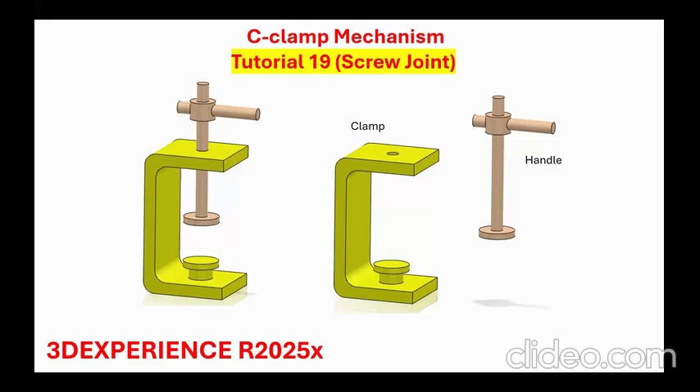Just to put things in perspective, dimensions are not important here, but I'm going to assume that this is 12 centimeters and the initial distance between the clamp and the wall—I'll call this thing handle, and the wall—is 3 centimeters, just to put things in perspective. And I'm going to assume that we have a pitch of 0.5 centimeters. So every turn of the handle will advance this thing or retract it by 0.5 centimeter.

Now, of course, it's possible to do this and show it as a cartoon and it looks nice, but how do we verify there is actually physics there? So what I'm going to assume is that the handle turns at the rate of 2 turns per second. So in 1 second, it goes twice, and that means that this clamp will advance 2 times 0.5, which is 1 centimeter.

But then we're going to do simulation in 4 seconds, so it's going to be 4 times 1 centimeter. In other words, after 4 seconds, when we turn this thing 8 times, 8 times 0.5 is going to give you 4. So the offset, if we retract, is going to be 3 plus 4, which is going to be 7. Or obviously, if you advance this thing, this is going to crash into that—you can't do that. So I'm assuming that we are retracting this.

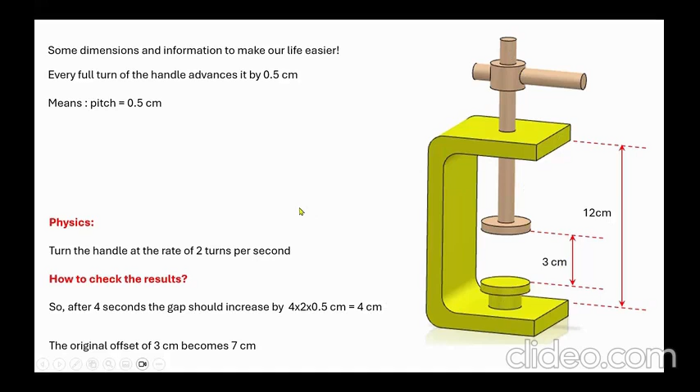Good. Now I will make a simplified version of that handle—basically the same thing, but simplified. Now, when we try to create a screw joint, there are many things that we have to select. These next 4 slides that I'm going to show you don't mean anything until we get there when I do the problem for you, and then I will come back and discuss them.

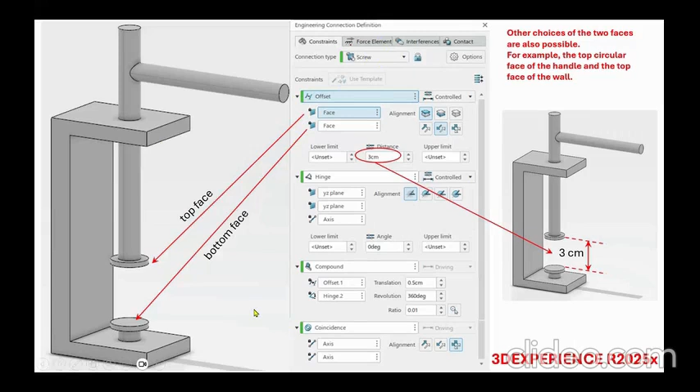So this is the first slide. This is the next slide. You have to select a bunch of other things. And then down here, this is where the pitch is defined. Finally, this one is something that's needed to define the axis of the motion of this C-clamp.

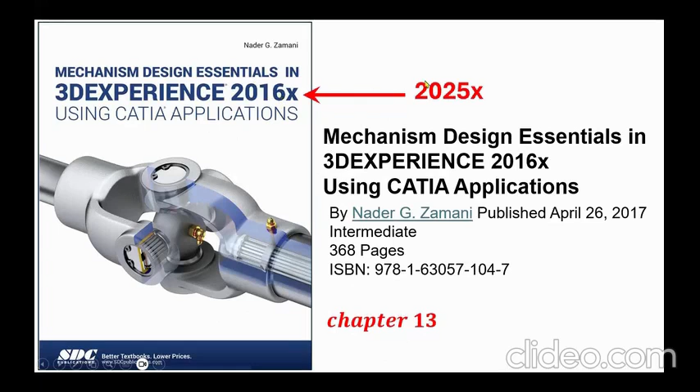This is chapter 13 of the textbook that I did 8 years ago, 9 years ago, and it was not updated, so I decided to do these tutorials instead of going through the book and updating it. Okay, good. So let's go ahead and create the assembly.

All right, let's go make the assembly. So already I'm in the assembly design. So insert the wall first—this is going to be the first part, it's going to be the wall. I'm going to make it.

So on that vertical plane, we'll sketch something that resembles that wall. Let's go with something that looks like an L. It's about 12—this is 12, roughly 12 centimeters. Doesn't have to be exactly that. It's just that I want to have an idea how big these things are, that's all.

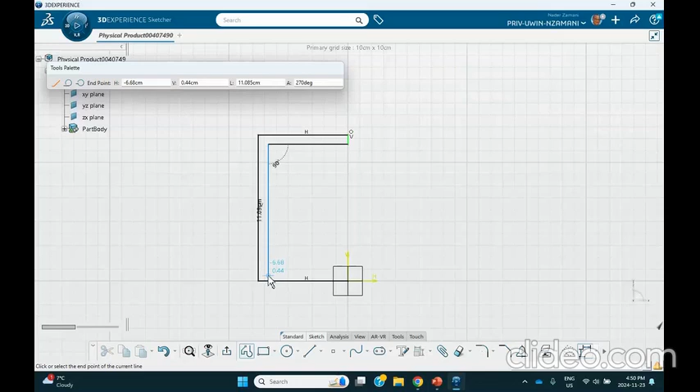Okay, good. Well, actually, let me make this thing 12. Here, dimension from here to here, 12 centimeters. All right, but it's just that this has to be a little bit higher. Let's move on. Exit.

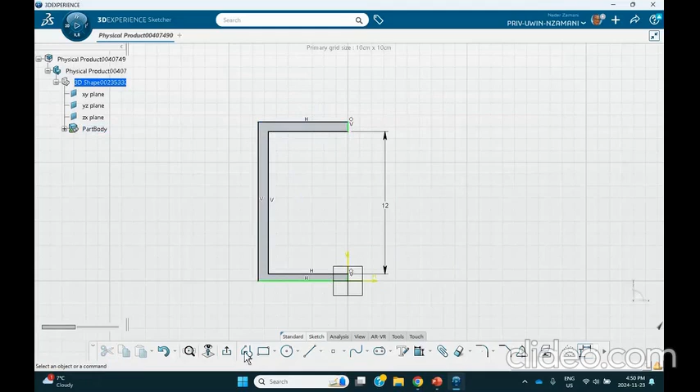And we're going to pad it symmetrically, just so that it's nicer. On that top plane, I will sketch a little circle—this is where the pin is going to go through. Exit. Make a pocket here.

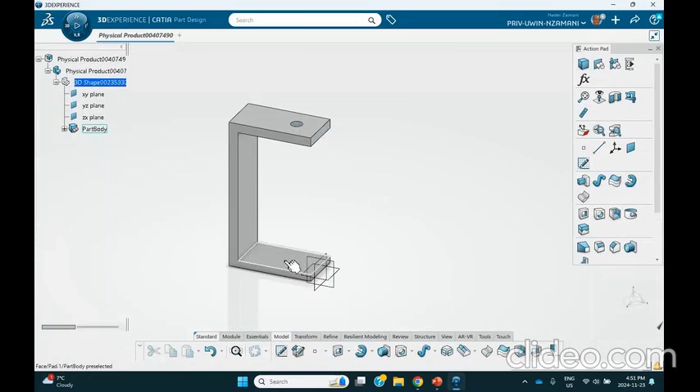Good. And then I make the stand at the bottom. On that plane, I will sketch. Why don't I project that circle? Okay, and exit. We pad it a little bit, maybe by 1 centimeter, and put the stand on top of it.

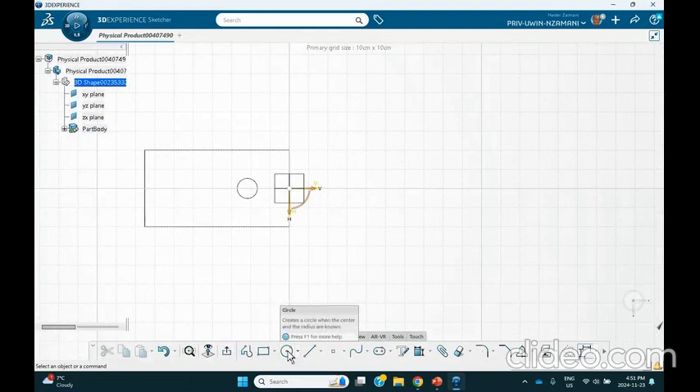So on that top plane, we'll sketch. Let's see now. I want to make something concentric with that. So right now, let me draw something like so, but it's not concentric. I'll control this middle curve, and make it concentric. Concentric. Okay, good. Exit. And now pad it by 0.25.

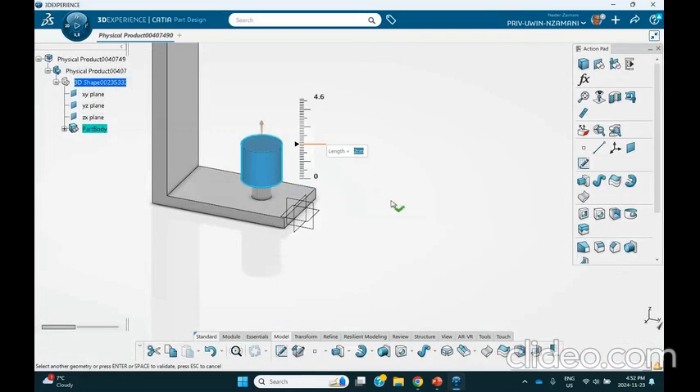All right, now we can go and make the rest of the thing. So all the way to the top, insert a 3D part. This is going to be the handle. Double click on it, and let's make it. So for example, on any convenient plane, for example on that plane, I will sketch a circle that size.

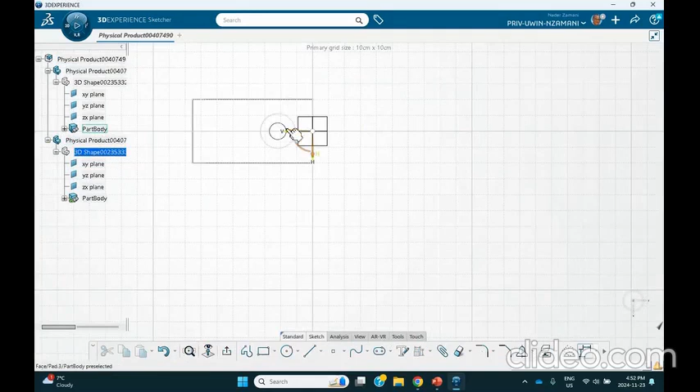So that being the case, I'll project this instead. There we are. Exit. And now I'm going to pad this. We make it in both directions. And yeah, I'll probably be okay. A little bit more, maybe.

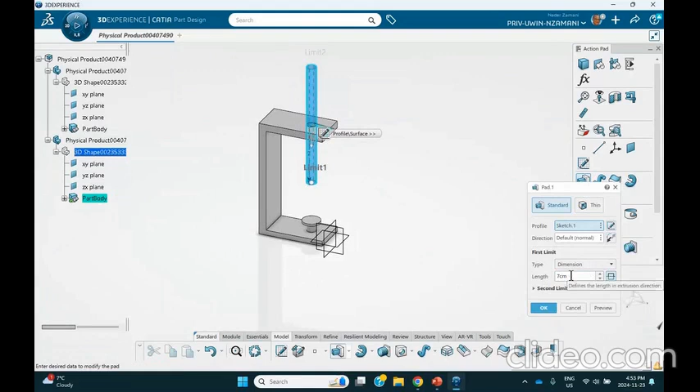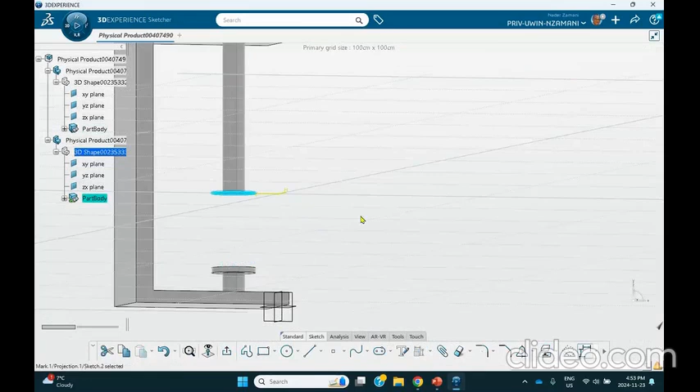Okay, good. So to do the rest of the stand, first of all, on that plane we'll sketch, project that big circle. It's just that I'm too lazy. I don't want to do a lot of circles and stuff like that. Project that. Okay, there we are. Exit, and pad it by 0.25.

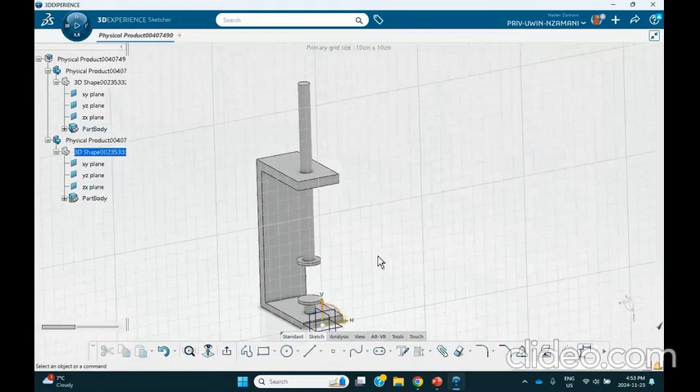Good, and finally the handle. There were different ways of doing it. So what I'm going to do is this: on that vertical plane, where is this? On that vertical plane, I'll sketch a little circle and then pad it. Maybe something like this.

Exit. And then pad it more. Oops, pad it. I find it easier like that. So pad it up to surface, up to this surface. And then maybe a little bit, yeah.

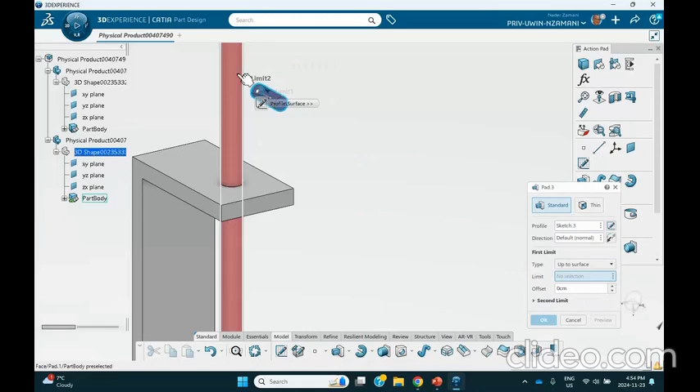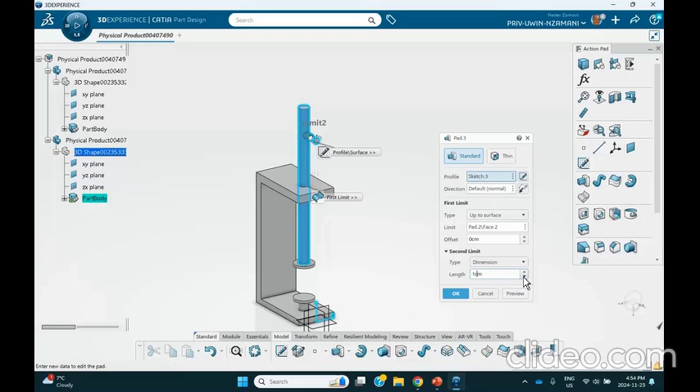That's good. I mean, if you want to make this thing longer on the other side, let me see for a second. Second limit. You want the second limit, go further this way. Okay, and these are basic CAD stuff that you already know.

All right, so that's this. So we have two pieces: we have the wall, basically the first piece, and the handle. Now, or the base and the handle. Now what I'm going to do is we'll fix the wall. We are in assembly design, so we go to engineering connection, very bottom fix, and select the first 3D part.

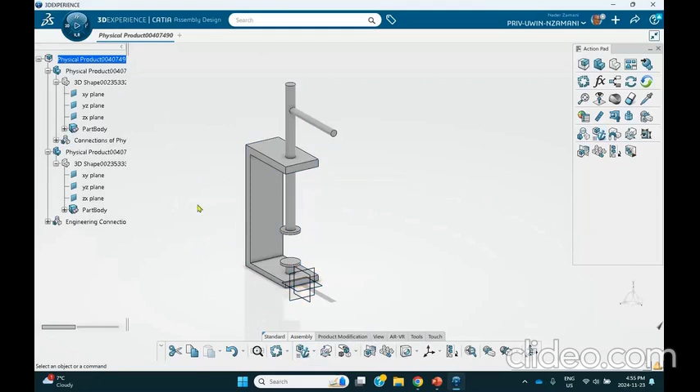Okay, now let's do the rest of the problem. I can move things around, but it's not necessary, so just leave it the way things are. And then I'm going to make my second joint, which is going to be under engineering connection. See, you don't find screw joint here. Go to engineering connection, not the standard one here. And in the pull-down menu, find the screw joint.

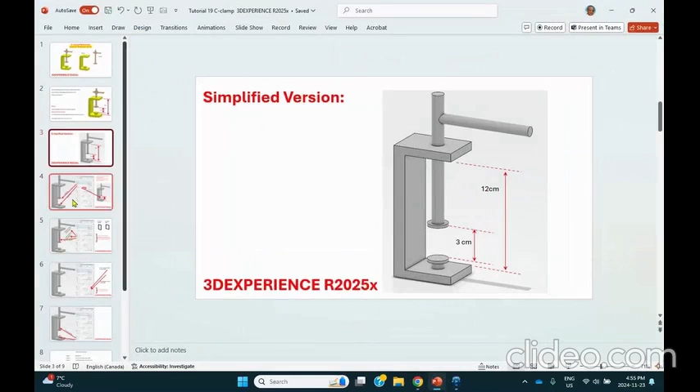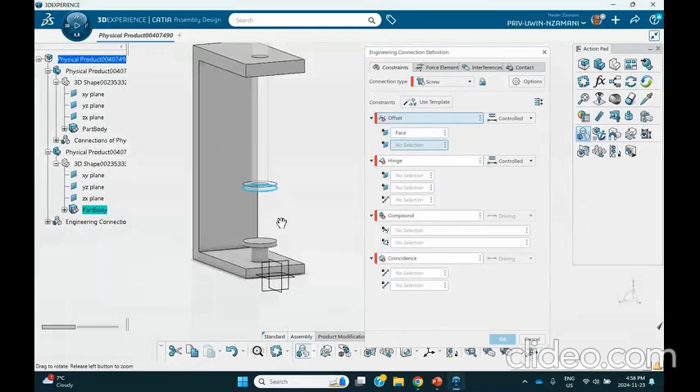Now this dialog box that you see here is like that, and we have to start populating it. Okay, so let's worry about the first one, which says offset. Go here. All right, so we need two planes, and I already said in the slide what to pick. You pick this plane and that plane. Right now the distance is 3.31.

I want the distance to be 3, so I'm going to make this thing 3, so it's going to move things just a little bit down. Good, good. So we already did this window. Now we go and create essentially the hinge.

And for the hinge, YZ plane of this? YZ plane of that? And there are other options too. And then the axis of the handle. There are other options, such as axis at the bottom, but that's okay. I'll do exactly like I said. So, okay, we go here to the hinge. Oops.

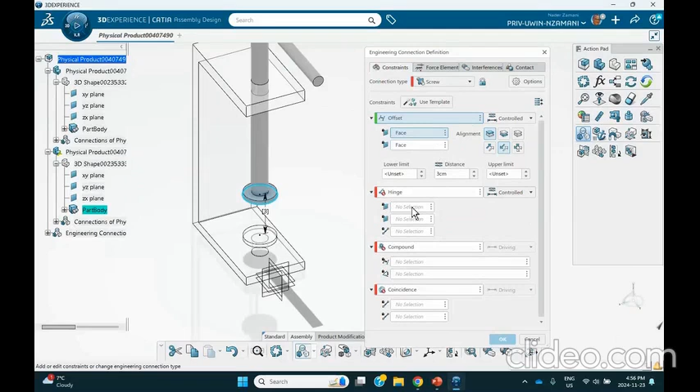Okay, hinge. I selected this box so that it moved down to the hinge. So this plane, YZ plane of the wall? YZ plane of the arm basically? I notice that right now the angle between them is 0.

And then for the axis, I select this axis. See that for this? I select that axis. Right now the angle is 0. I want to keep it like that, no reason to change it. So see, YZ axis, angle is 0 because the handle is sticking out.

And then the next one, we go to the next set of things to pick, and that is specifying the pitch. I don't do this except I put the right numbers that I want in it. So it automatically puts something there which is default and I don't want it. So I want this thing to be 0.5 centimeter, and this thing to be 360 degrees.

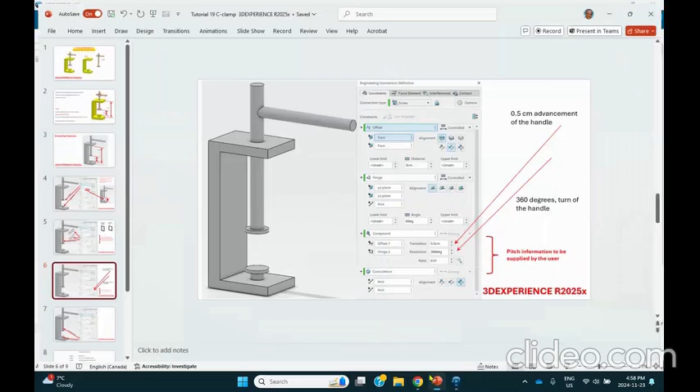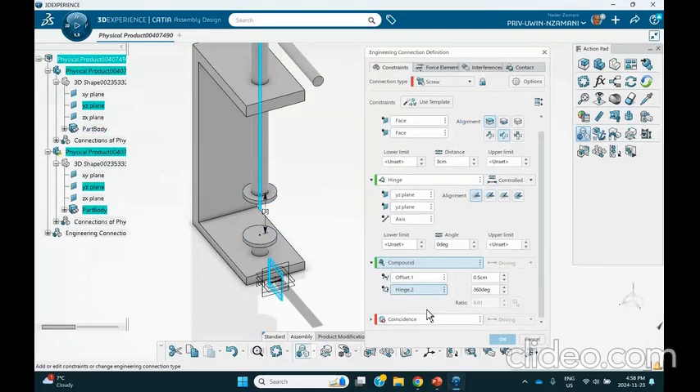Okay, and then I have to go to the next one, which is selecting these two axes. The last set, selecting these two axes. I'll go here and select.

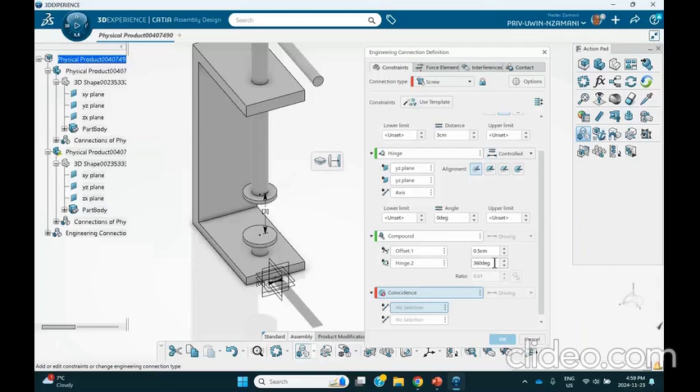Okay, so now we're going to create our screw joint. To do that, you have to go to the engineering connections. Notice that you don't find the screw joint in the list that you have here, so you click on the engineering connections and use the pull down menu to find the screw joint. Okay, let's find out.

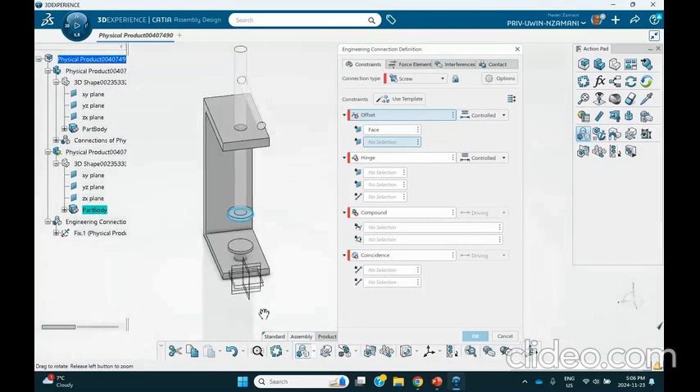This is the same dialog box that you saw here. So first we're going to define the offset needed here. There's 4 sets of selections that we have to make. The first one is called offset, and we take the bottom of this stand and the top of that stand. Okay, so let's go out here, the bottom of that, the top of that, and it says that right now it's 3 centimeter gap between them.

Which is good. I mean, if you want to make this thing 5, for example, look at what happened. But that's not what I want. I want 3, just happen to be 3. So good. Then we go to the next dialog box selection, which is defining the hinge basically.

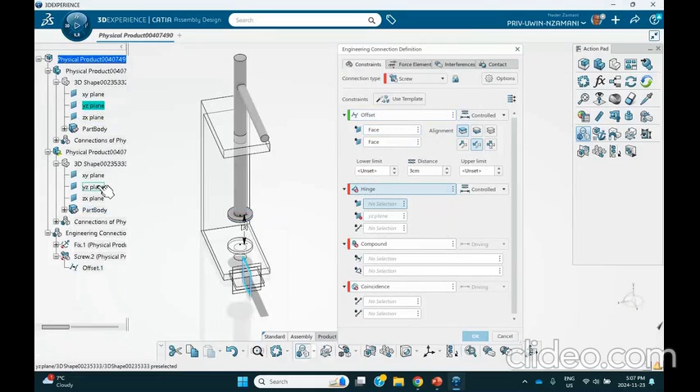So I select the YZ plane of the handle, YZ plane of the base, and then for the axis, this axis. Okay, there are other choices that you can make as long as you create the hinge correctly. So you put the cursor in this box so that it releases what's up there, and select the YZ plane of the wall, YZ plane of the handle, and the axis of the handle. Okay, and so what I just did was to complete that portion.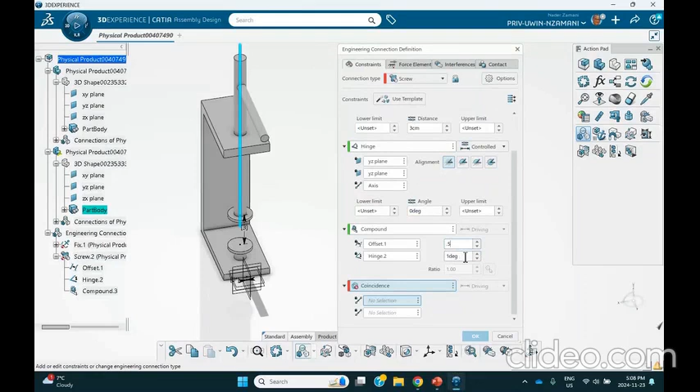The third one is to specify the pitch. Okay, now something is calculated for you, but these are default values and they're not correct. So this should be 0.5 centimeter for every 360 degrees rotation. Now, ordinarily, look, ordinarily when you do that, look, so I just did this. The only problem is that the ratio is not calculated correctly, it was not even calculated.

Now, I noticed that this is a very, this must be a bug or something. Notice that you can't go and select these things. See that? So what I found out is that if that happens to you, and I noticed that sometimes it does, what I suggest is the following.

What I suggest is the following. You have to select these two axes, but it won't let you do that. It's very fussy. Sometimes it does, sometimes it doesn't.

What I found out after a great deal of frustration was to say, okay, let me delete this, let me delete this last selection. Okay, notice that as soon as I deleted it, it let it go. Move on now.

A screw joint, something was created here. Double click on it, double click on it. That thing opens up. Okay, and you have two choices. You can go to screw.

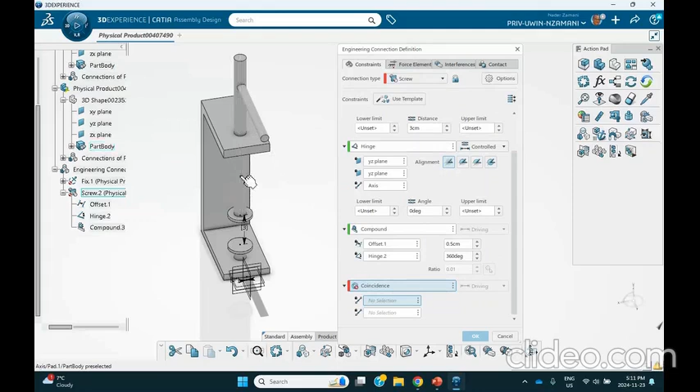Okay, and now you're gonna select this. Okay, now you're gonna select this and select this axis. So I'm sorry, but that's the way it's working.

So I ended up deleting this, so it basically let me go out of this dialog box selection. And of course, because this last one was deleted, this was no longer a screw. It says user defined.

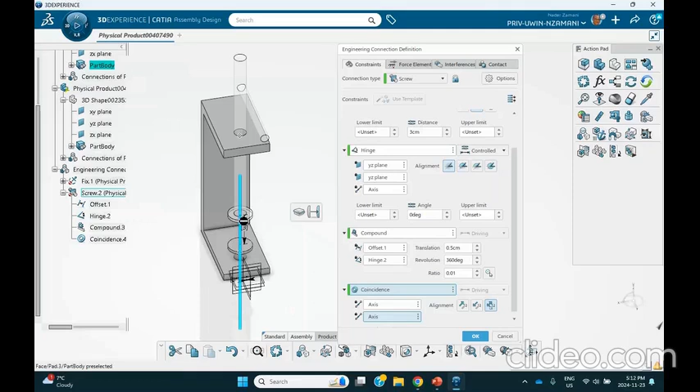So to get back in there, I double clicked on user defined and I went here and changed that to screw. This thing appears at the bottom and now I can select it. Terrible. Say okay. Notice that it is changed.

Okay, that's good. Everything is done here. So we're going to go to mechanical systems design.

I've noticed that this happens sometimes, most of the time. So the only way around it that I could figure out was to delete that last set of selections. When you delete it, change the screw to user defined, because that's missing. Then we close that window, get back to user defined restraint here, user defined joint from the tree, and change that user defined to screw. The bottom appears, and at that point you can select those two axes, the axis of the handle and the axis of the stand.

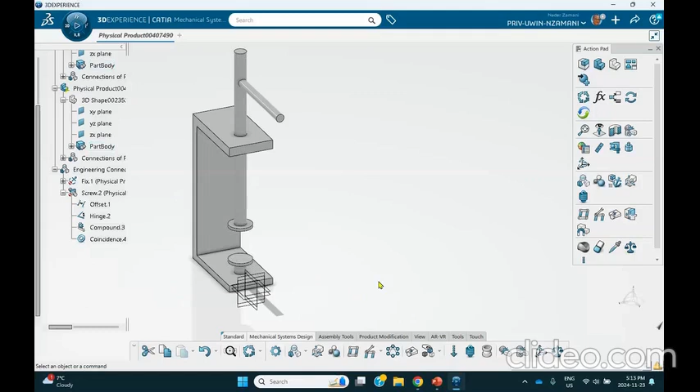Something wrong there. Okay, so let's go and create our mechanism. Did I do it? Yeah. Let's see what we've got here. There's a fixed part, which is the wall basically, or the base, and there's a screw joint. Okay, so it's okay, things look good.

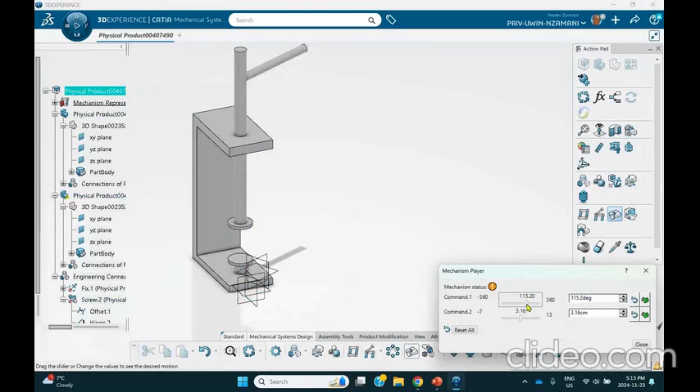Now if I try to use the player here, there's two radio buttons. One of them is for the rotation of the handle, the other one is for basically moving up and down of the thing. But this is a cartoon, there's no physics here. So to put the physics, I'm going to go to Mechanical Systems Experience.

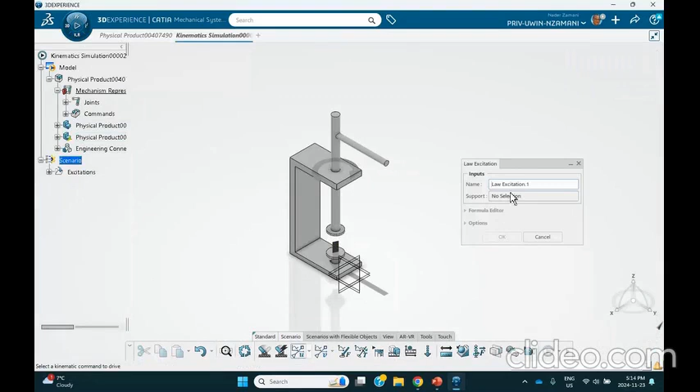Okay, we create a simulation. Now the law is this: you go to the law excitation and select the first command right here. This has to do with angle, so 0 degrees, and I can put down here, this 0 doesn't matter. So we put down 2 or 4 turn underscore second. That was the deal, right?

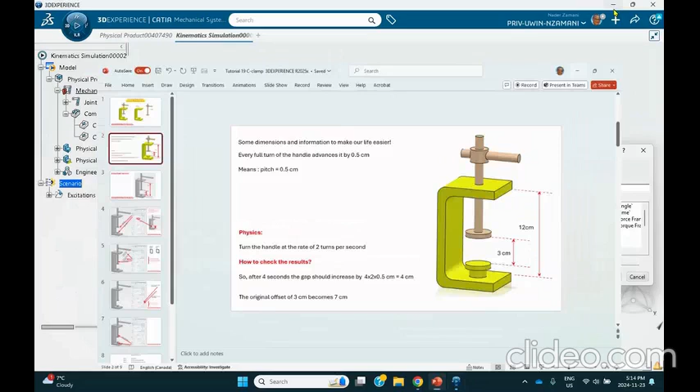Oh, 2 turns per second. I'm sorry, 2 turns per second. Let me make that thing 2 turns per second, times time. You say okay, you say okay.

Let's do a 4-second simulation. So I go to the kinematic scenario. We're going to create, this is the law that I created, I put it in there. Parameter, we're going to do it over a 4-second interval. And this one is going to be 0.1 so I can see it better.

So basically in 4 seconds, that handle will turn, let's see now, 2 turns per second over 4 seconds is going to give you 8 rotations here, right? Remember the physics that I put in there: it turns 2 turns per second, over 4 is going to be 8 complete rotations, and for each rotation it's going to move by half a centimeter. So 8 times half a centimeter will be 4, and then the gap here was 3, so at the end there should be a 7-centimeter gap between them.

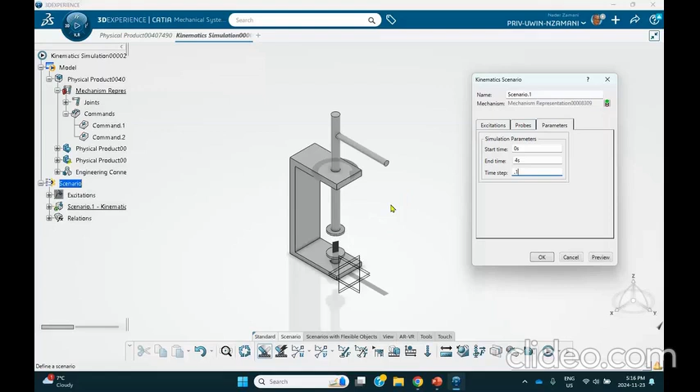Okay, so that's fine, so say okay. Well, we can change things if needed later. So you basically compute it.

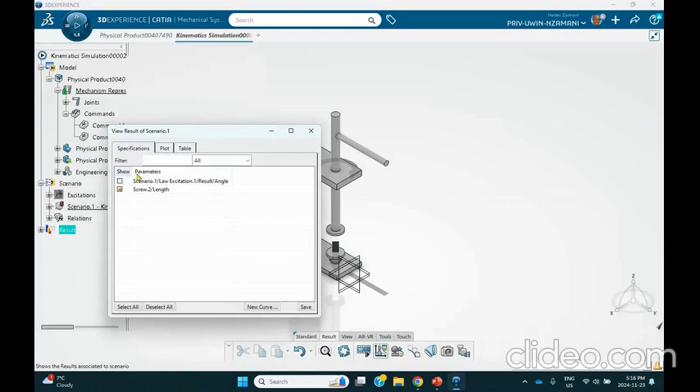All right, now how do we check whether it actually separated by 7 centimeters? You click on results, you go to the view scenario results. Just show me the length, which means that gap, because remember that was the offset that we requested. You plot it. 7, see that? There was an initial gap of 3 centimeters.

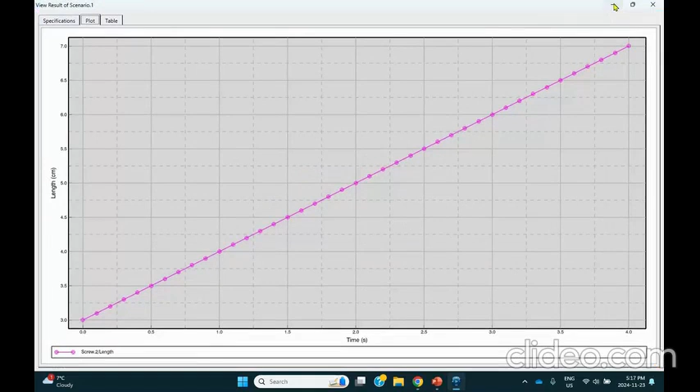After 4 seconds, this thing turned 8 times. Each turn was half a centimeter. 8 times 0.5 is 4 centimeters. 4 plus 3 is 7.

So look, this is—I noticed that this business of not releasing that dialog box happens sometimes. So what I suggested is that we get rid of that last set of selections, meaning just delete this. When you delete it, this screw turns into user defined, but it releases it and calculates the pitch, the ratio correctly—well, at least it releases it. Then once it releases it, you go to the tree, double click on it, it puts you back here, change user defined to screw, and then select these 2 axes. It's not supposed to be like that, and it's not always like that, but I've noticed that it happens.